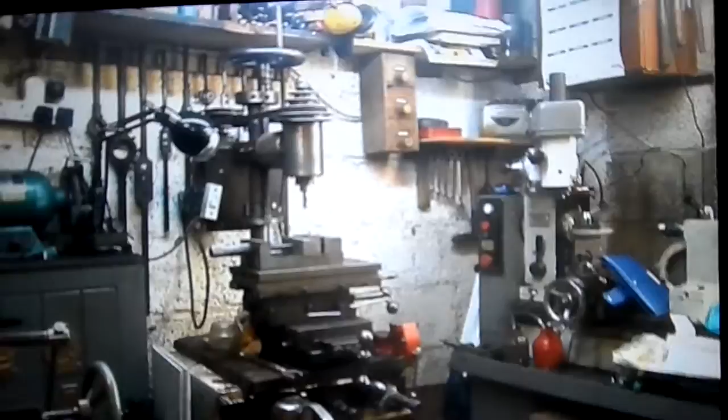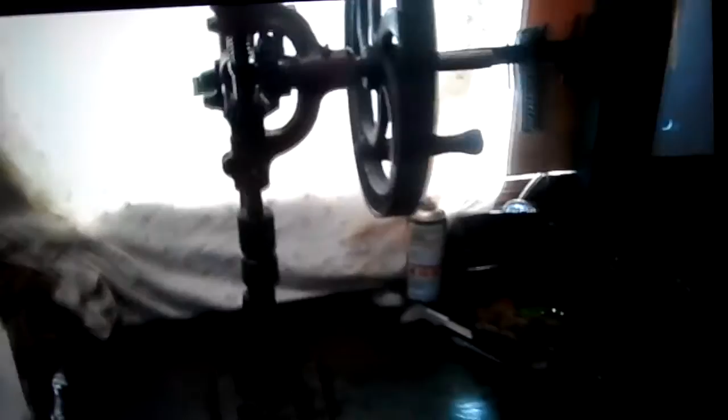I first got the idea from this hand drill, which gave me the idea of building a little milling machine, and that's what started it. I started fooling about with some drawings, sketches, before I drew up my set of plans for it. So here is the start, to give me the ideas.

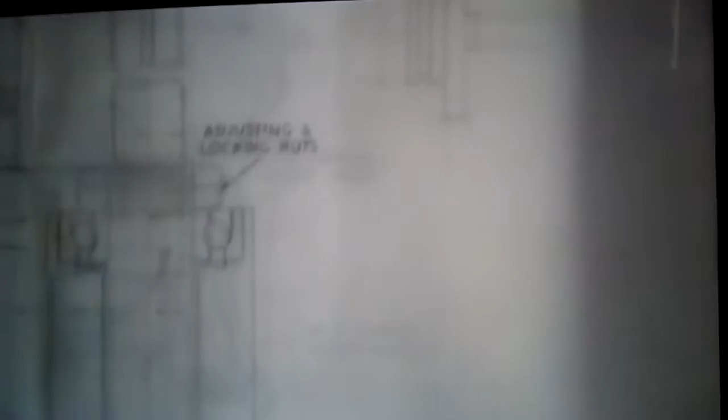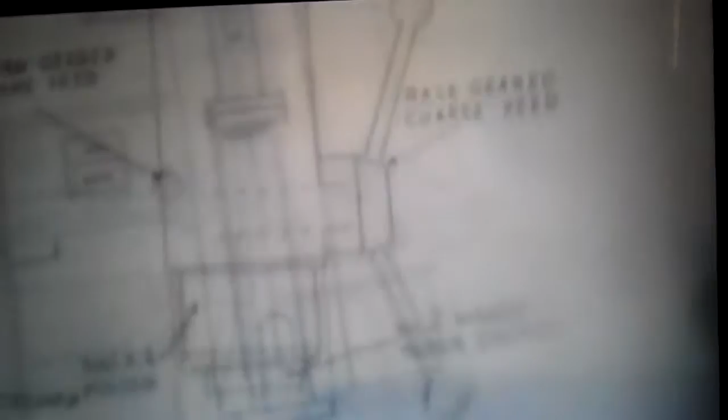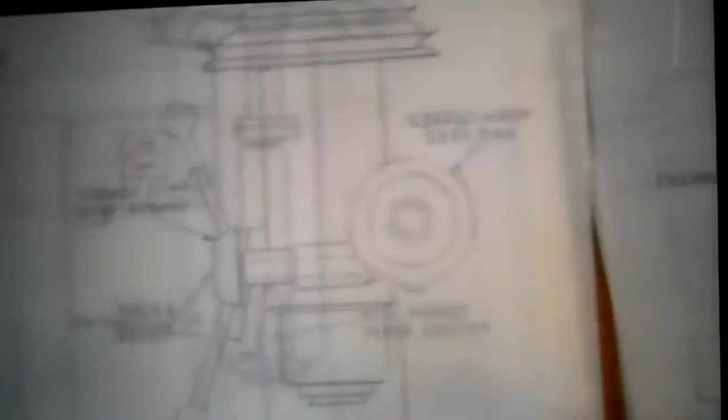Now, these were just sketches I had made. This is tracing paper. I didn't go into the proper sizes, or I didn't have the materials at the time, but I just had to go then with whatever materials I could get hold of at that time. That's what I ended up with, which I'm very pleased with the work I've done on it.

Now, the work I've done - this base plate, this was remnants of a large bit of plate at work. This was what you would call a cutting-off bit, and it lay for a while and I got it.

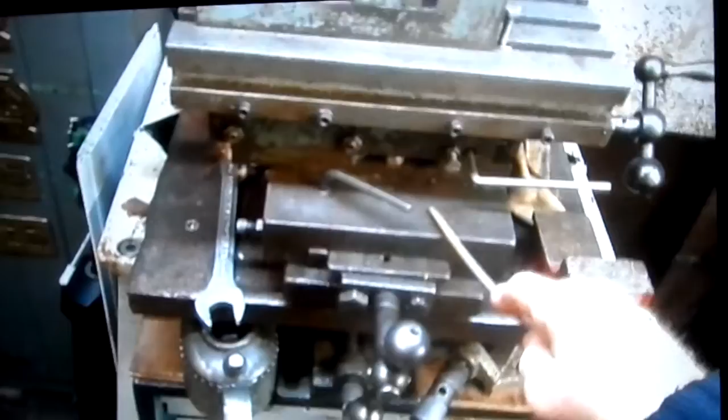Now, one of the mates at that time started dealing in a bit of scrap, and he had this really huge lathe, about 9-10 foot long. It was Wilson, I think, was the name, and the date on it was 1905, Glasgow. And I got the cross slide off of it. There was a large piece that came up here, it was on it, that held a really huge four-way tool post, so I discarded that and had to cut this bit off.

And I had that for quite a while. I went round scrapyards for 2-3 months, and look, I came in with this cross slide off another old lathe in a scrapyard, which gave me this table.

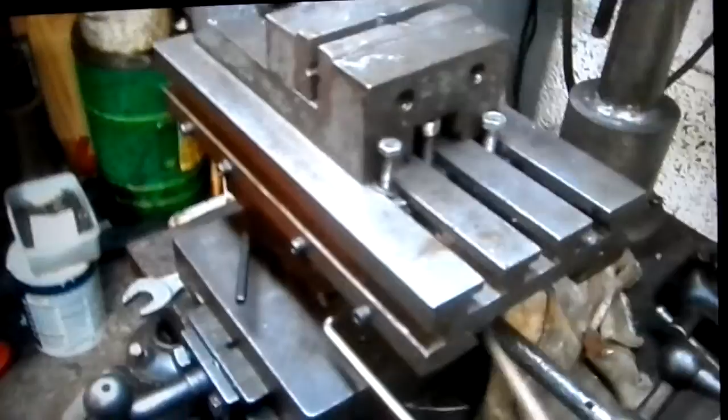For steel, I fell in with a bit, I think it was about 14 inches long or something, and 2 inches, but a mate had a large milling machine, I think it was a Cincinnati, and he let me use it one weekend, and I made this table. And that got me started building this, and then this.

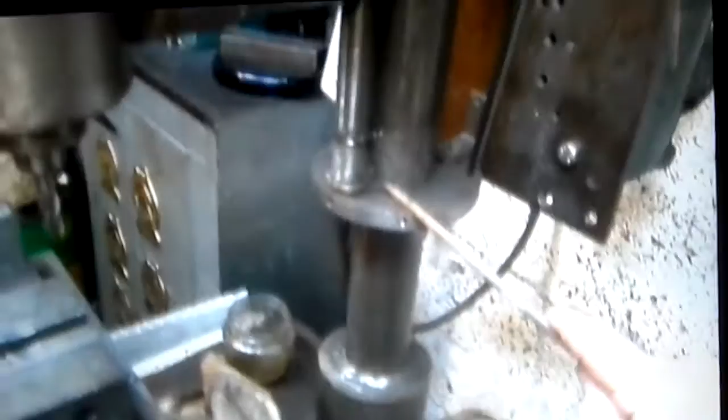And for a column, I still have quite a few bits of 5-inch shafting. That was this 5-inch, this, and this, all came off the one shaft.

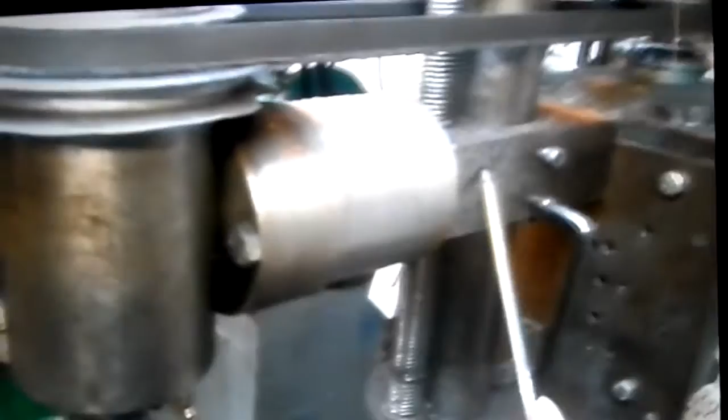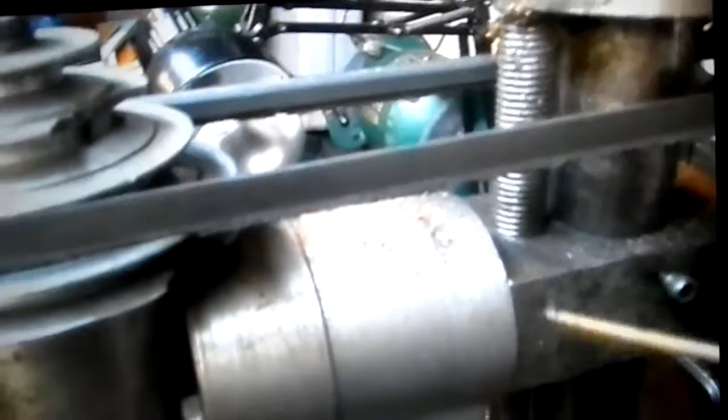And a 2.5-inch shafting, and I made the screw, and this was more scrap and work. It's 3.5, I think that's 3.5 by 2.

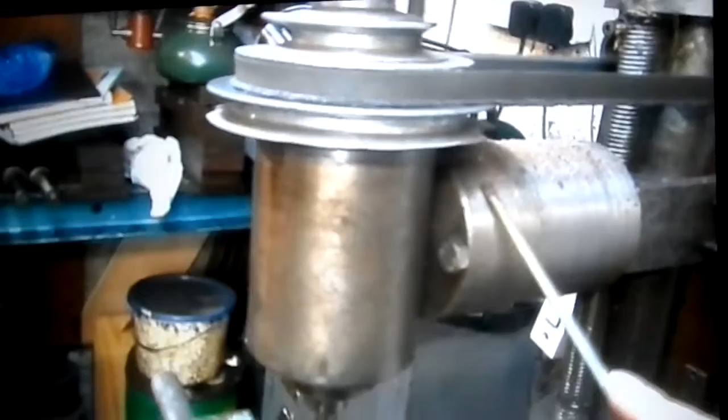And I made this for the tail, for the rise and fall. This was a bit of heavy duty box section that I used to start with for a couple of years, until there was a bit of vibration, so I decided to change it.

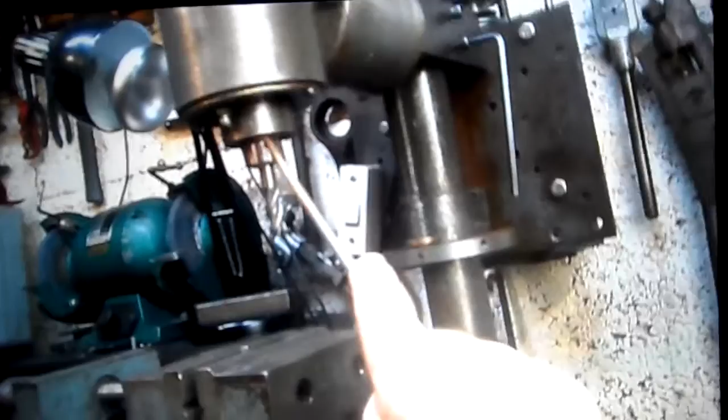This is 4-inch shafting, which I made, and I had to bore it out, and I made this column, or whatever you would call it at the moment. It's done at Morse 3.

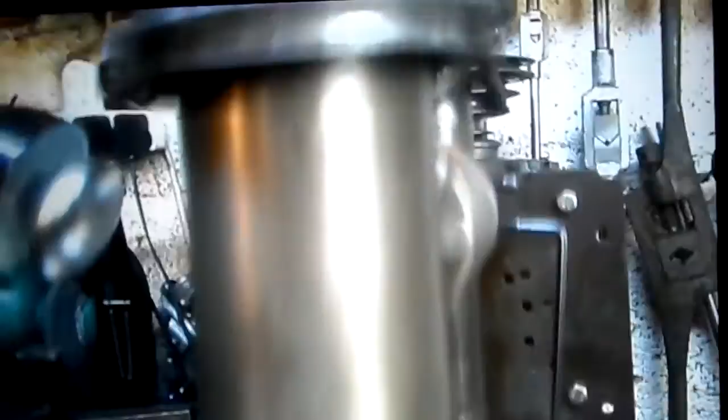The bearings - this is a plain bearing here, thrust bearing. Now I have a cover over the bearing with a grease nipple to keep it greased. I also have grease nipples to keep all parts greased.

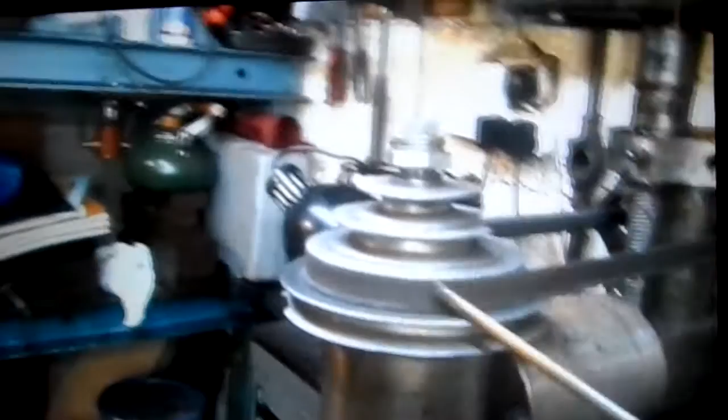And 4-speed. I think this is a 3/4 horse, single phase motor.

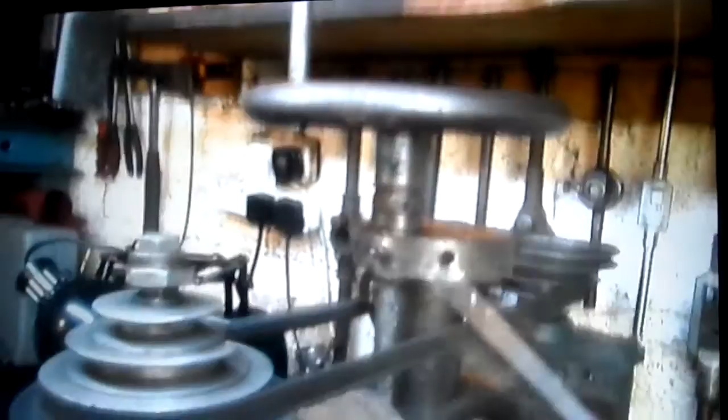Now this was the hand wheel off the large tailstock on this huge lathe that I mentioned.

It has served me well, this little drilling machine. I've done a lot of work on it. I have tips on using it, making parts on it. Not too noisy.

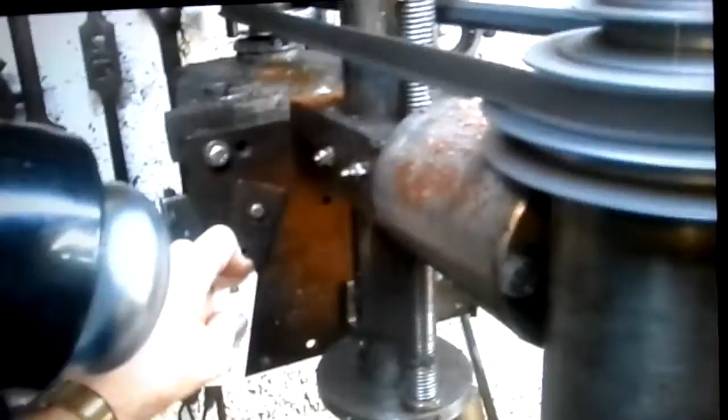Nice movements. This one is kept locked when I'm not using it. That is for this, to keep it locked. This one is for this table. This movement.

And I have a tape on making this vise when I made it. I'm really pleased with this little milling machine, and I fell in with this stand. One of my sons had it with a saw on it, and he gave it to me. He didn't need it, which came in very, very handy. Gave me a lot more room.

The drawers, a nice fit. I have a tape on cleaning these drawers up, putting them in, filling them. And I hope this explains a lot more.

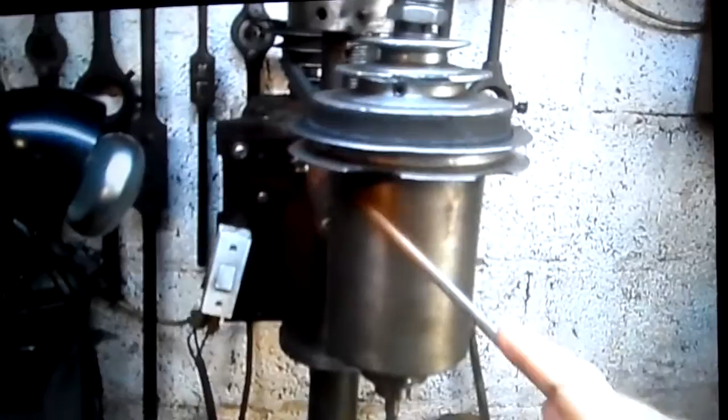Robert said, I say there's a thrust bearing here and a plain bearing for to give me the proper movements.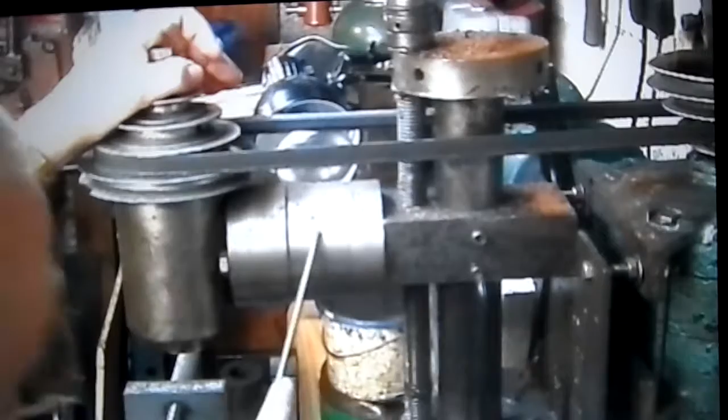To go into detail on this, it's in 3 stages, which I changed over from the heavy duty box section. This bit was bolted into this block, which meant 2 holes was countersunk here, and this threaded to carry the intermediate bit, which, one here and one on the other side, was drilled and threaded to carry these bolts.

Now this is milled flat. I think it was 150 thou, something like that, for to give me a flat base, which was onto the box section at that time, but it also done well. And these are all trued up, and this has done the job very, very well.

Very pleased with it. Now these are the collets which I use. I have a series of these collets to carry all different sizes. This one is a 3/8. It can also take the long series one. I use the thread. A lot of my end mills is threaded, but that doesn't matter.

This is threaded. Now this is the bolt for to draw up the collet.

I had to make all this. I had to, on this armature, and here I had to do a Morse 3 taper. It carries the collets. These are all Morse 3, which was very satisfactory. Morse 3.

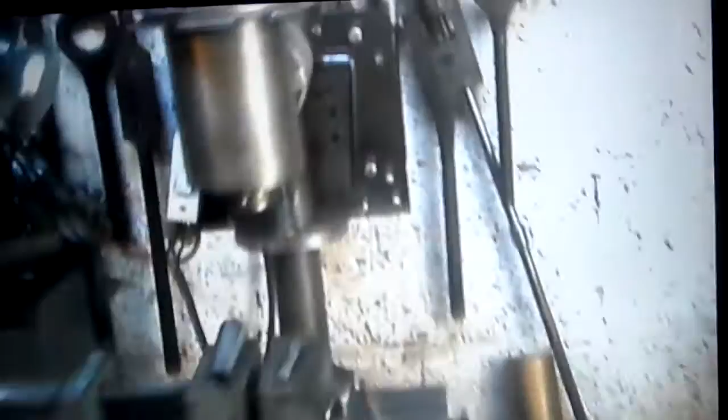I used to have a swinging arm here to carry the motor, but there was vibration in it, so I changed over to the plate, 4 bolts, with adjustment on the screws.

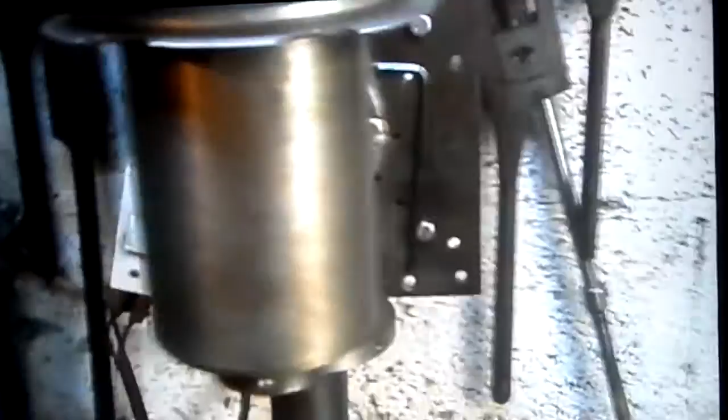I have 2 screws for tightening the rise and fall block.

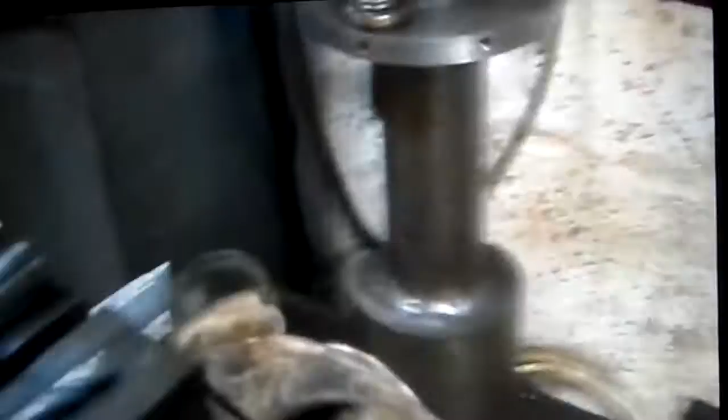Now, for to weld this, I had to make sure everything was trued up before I welded it, all trued up. And as I say, I am very pleased with the work that it does. Very pleased.

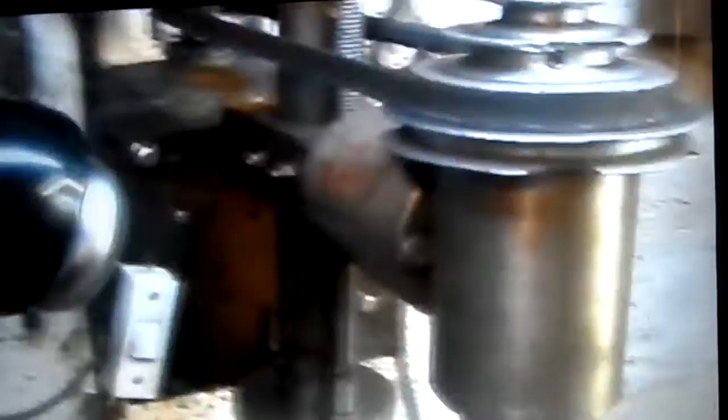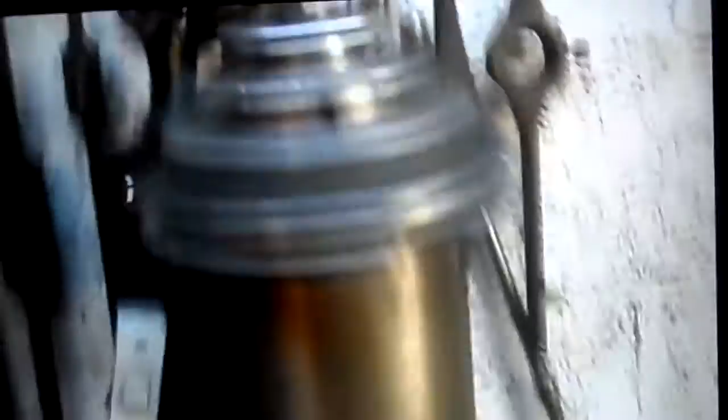Maybe I'm being prejudiced, but as a little milling machine, I'm pleased with it. 4-speed. I seen a 2-speed motor which I was contemplating, which would have given me 8 speeds, but I will have to think about it.

That is my milling machine. The screw went on it, over 100 years of age. I suppose that wasn't bad, but it was brass. I have 1 or 2 tapes on my website making the screw, but this screw went.

Now this is it. That's the plans I drew up for it, which I made. I have, as I say, 1 or 2 tapes on my website making it. I had to make it out of steel. I didn't have the right size of bit of brass.

I could have used a bit of this, but it meant squaring it all up first. But the steel seems to work very well.